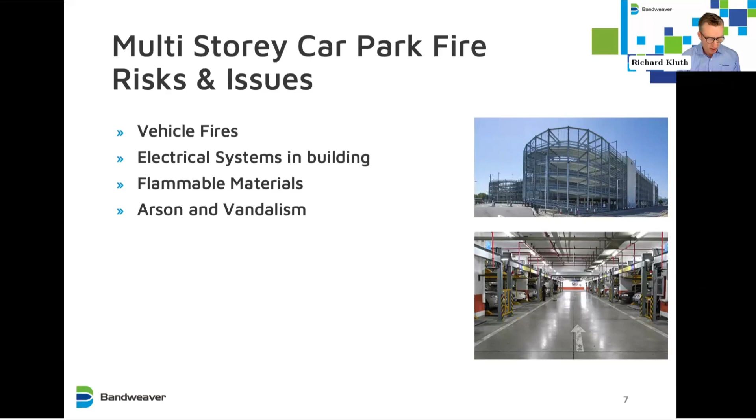Arson and vandalism - unfortunately these can be susceptible to both arson and vandalism. Inadequate ventilation and smoke management, especially in closed car parks, can lead to the accumulation of toxic gases, which poses additional risks both for people in the car park and the emergency responders.

And emergency responders have limited access in some cases. They can have issues accessing the different levels, which can hinder the response time and allow the fire to escalate dangerously.

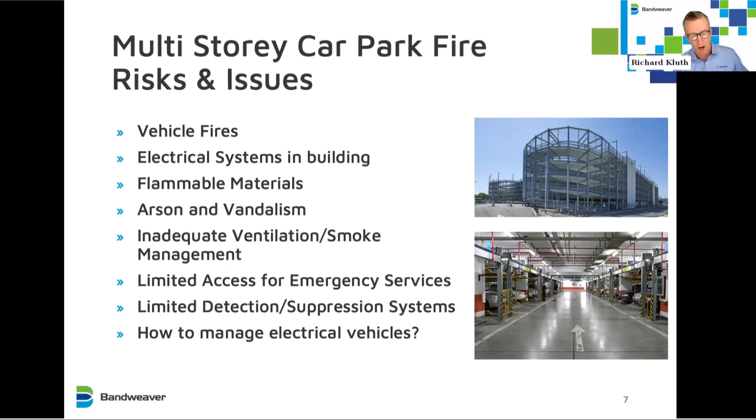This is going to introduce new fire risks which need to be taken into account. We'll start with the study of a major fire incident in the UK, and I'm going to look at the Echo Arena car park in Liverpool. A few reasons for doing this.

One is this is one of the largest fires in car parks in the UK, and as a result there's a number of comprehensive studies and materials that we can draw on from this to understand better what the issues are and how this can be addressed going forward.

So the UK Echo Arena, this was a major fire event that happened on the 31st of December, New Year's Eve, in 2017. More than 1,000 cars were destroyed, so it's a very, very large fire.

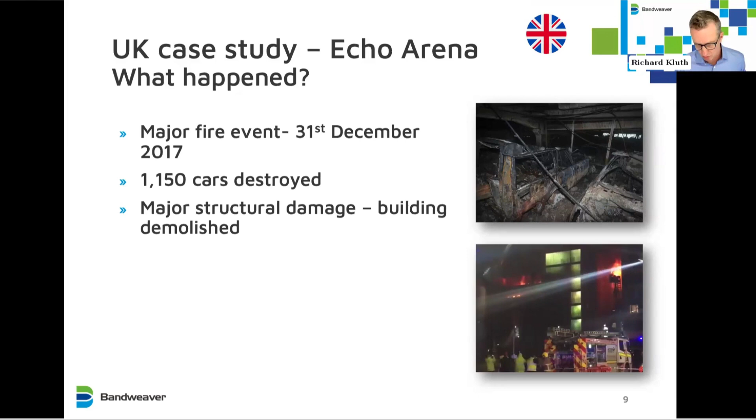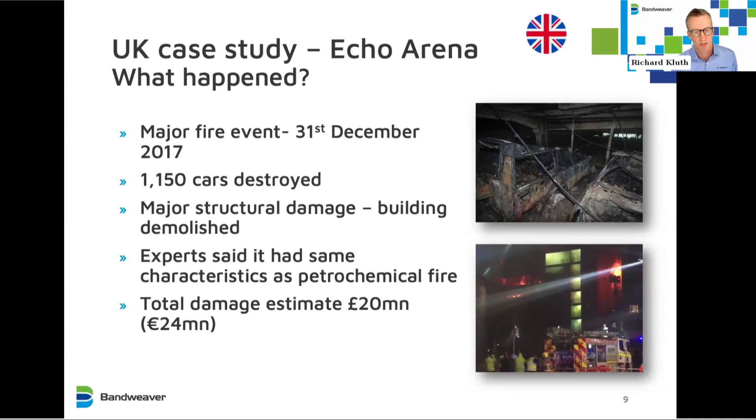So large that the building had to be demolished. There was major structural damage. In fact, the fire burnt so fiercely that experts said it had the same characteristics as a major petrochemical fire, which led to total damages of more than £20 million, or 24 million euros. So one of the largest car park fires in UK history.

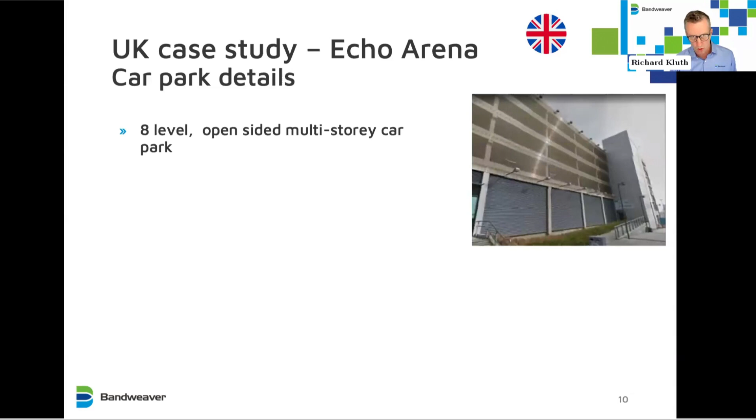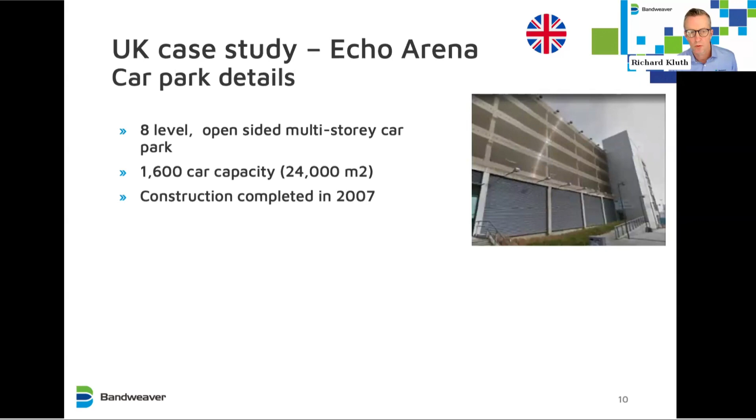So we'll go through the details of the car park. It's an 8-level, open-sided, multi-storey car park, with capacity for 1,600 cars and 24,000 square metres of surface area. This was built in 2007, so it would not quite be 20 years old now.

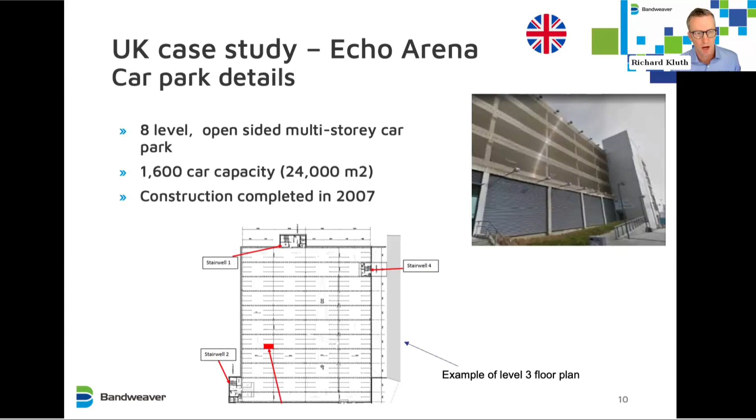And there we can see the floor plan of one of the levels - that's actually level 3, where the fire started. So it gives you an idea of the scale of the car park. And we'll have a look at the timeline now to give you an idea of...

...how it played out when the fire was detected, how the fire services handled it, and how long it burned for. The emergency services were first contacted at 4:42 in the afternoon, 16:42. They were on scene within 8 minutes.

At this point the fire was already burning quite fiercely. It was on level 3. The accounts were that it was already leaping across empty bays, and an additional vehicle was becoming involved every 30 seconds. So the fire was already intense at this point, but was believed to have been on a single level.

About an hour, just over an hour later, came the realization that it had spread to another level - level 4. At this point, all the firefighting was only on level 3, and this was the start of when the fire really started to get out of control.

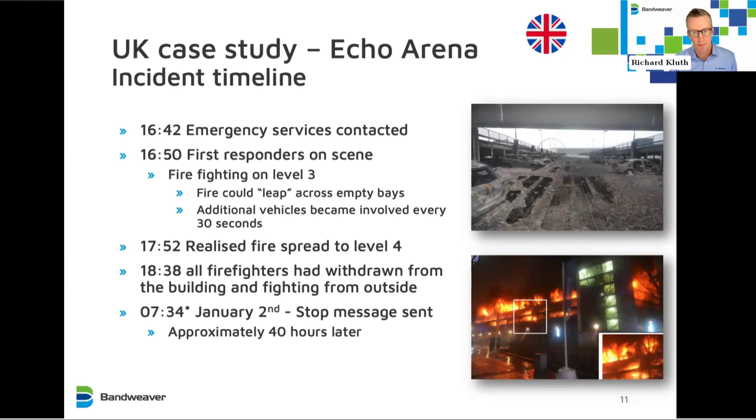If we look at where it was detected and how, that gives us an idea of what systems were there, and perhaps some of the shortcomings. So the first alarm was actuated at 4:43 - this was a manual call point, so this was a minute after the fire brigade were called on level 3.

And then at 4:49, the first sensor picked up the fire, which was a multi-sensor in the lift lobby. Interestingly, subsequent analysis showed that the incorrect location was put into the fire panel. It didn't matter in this specific case, but it goes to show some of the issues - even with detection systems you can sometimes not get the right location.

So very important issues. At this point, no other sensors detected anything at any other level. So they fought the fire on this level, and that was the way it was understood until 5:52, when CCTV confirmed there was a fire on level 4, but still no other sensors had detected it.

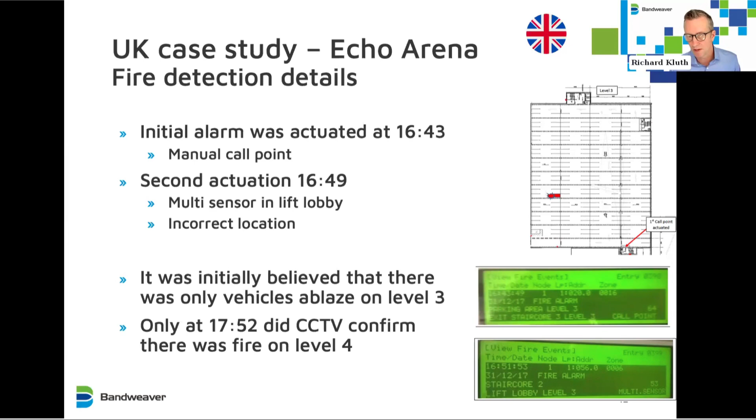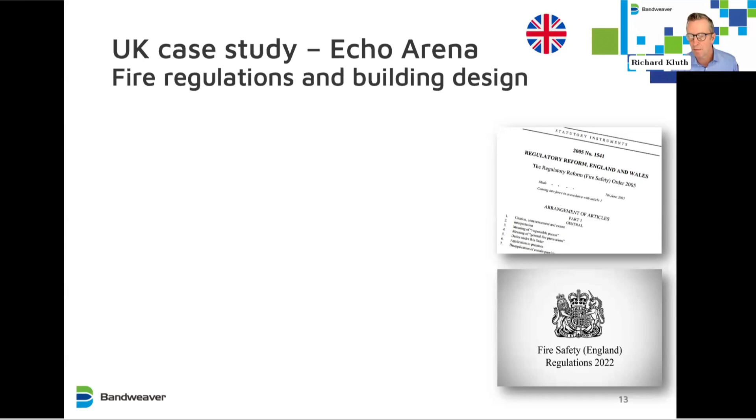So I think now we've seen the issue of the scale of the fire, it's good to have a look at the legislation which determined for this building and others around the UK, what legislation is involved in determining the designs of both the building and the fire detection systems.

In the UK, most of the research goes back to a study in 1968 held by the Ministry of Technology and Fire Offices Committee, done 56 years ago. A lot of the regulations and design for this car park and others went back to that research. At the time, some of the base assumptions made in designing the car park and the detection and suppression included that fire would not spread from one vehicle to another, which is clearly not the case here.

There was a lot of flashover from one vehicle to another, and also the assumption that fire brigades would arrive in 3 to 4 minutes to get the situation under control. With modern traffic, that's not a realistic expectation. In this case, they were there in 8 minutes on New Year's Eve. I think most people say that's pretty respectable, but 3 to 4 minutes seems overly optimistic for most cases.

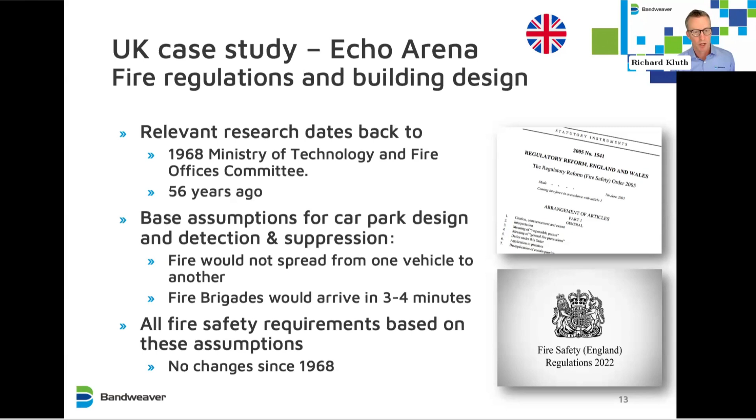All of the requirements based on that haven't changed since 1968. We'll look at the conclusions of the report, but I think there were a lot of questions as to whether that should be updated.

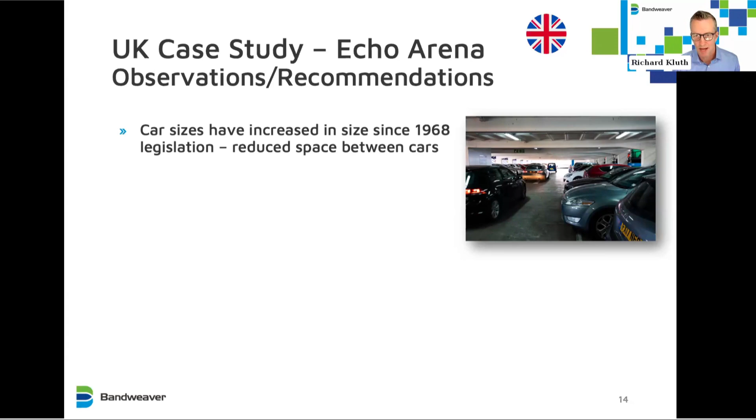Looking at some of the observations and recommendations from the various reports written on this fire, one key observation is that car sizes have increased significantly since 1968, so there's a lot less space between the cars. That's one of the key factors for the flashover.

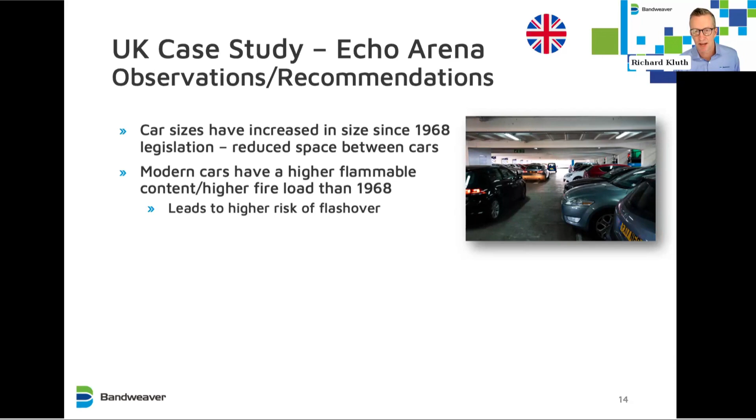The other thing is that as cars are bigger, they also have a higher flammable content, a higher fire load than in 1968. So the fact they're closer together and have a higher fire load doubles up on the higher risk of flashover, along with different materials in the car.

One aspect that changed is that petrol tanks are now made of plastic. If the fire temperature gets high enough, these can melt and lead to fuel running along the floor, which is what happened in this case, and was another cause for the spreading of fire.

The original modelling done by BRE does not replicate what was seen in this scenario. As well as the flammable materials in the car, there's much more flammable material in the building. Everything led to a situation which created this inferno, which probably wouldn't have been envisioned based on the material seen in 1968.

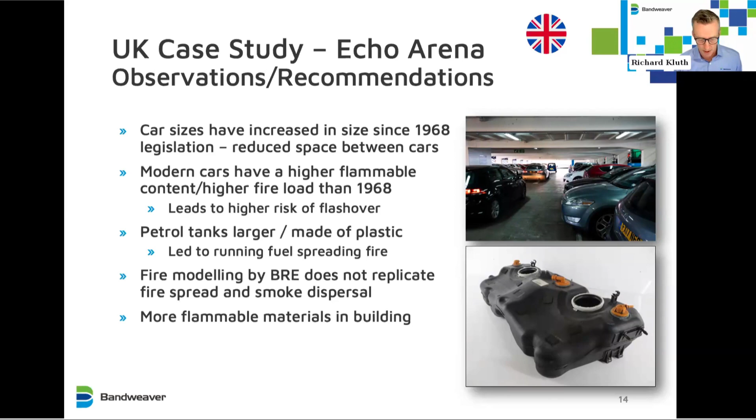Some of the conclusions drawn from this are that a lot of people feel the legislation does need updating to reflect the changes in vehicles and buildings we've seen over the last few decades.

Looking forward to electric vehicles, this is something for the future with different fuel types and charging stations. It changes the risk profile, and this is something our partners at SenseTech are starting to look at and integrate our technology into, but it's also something the legislation will be looking at.

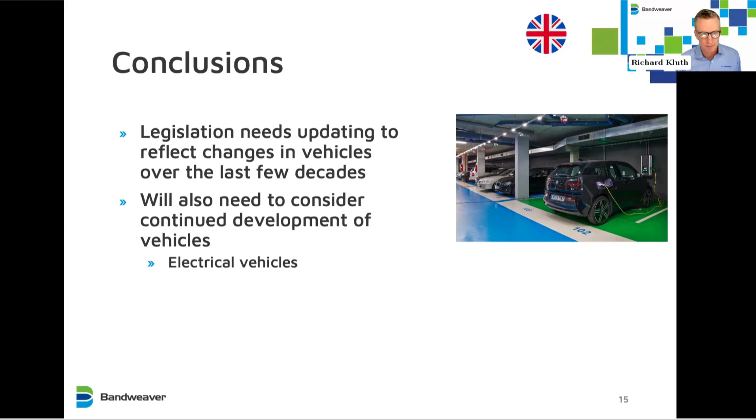In the UK, there was another fire at Luton Airport in October 2023, which again is increasing the pressure. There have been some initial discussions, but in due course the reports will come out with more recommendations. I think we are in a climate that is likely to see updates.

So if we move on to Europe and look at the regulations there - Europe is a combination of different countries, so each one has its own arrangements. We'll start broadly looking at the similarities in Europe and some of the frameworks, then do a deeper dive into the Netherlands, look at the regulations there, and really show how that results in specific detection technologies being chosen.

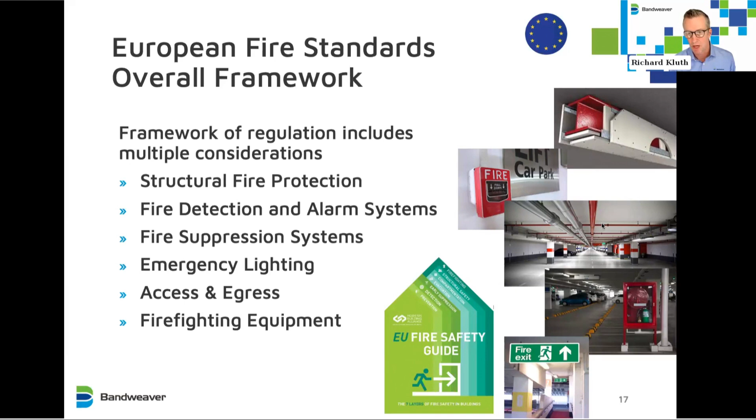There's a lot of different legislation, and for this we need many different bodies to manage it - this can vary from national, pan-European, local government bodies, through to international insurance companies. All of these will have different recommendations and consultations on how the legislation is implemented in different areas.

So it is a complex landscape, and if we look at some of the commonalities between them, one of these is the European standards.

What is consistent across Europe are the EN54 certifications, and I'm going to introduce the relevant EN54 certifications that are appropriate to linear heat detectors and our fiber optic technology. EN54 Part 22 is what is applicable to line type detectors, covering copper-based systems, multi-point and fiber optic that Marinus will talk about later.

These standards are consistent across Europe, valid and highly respected around the world. We see Middle East, Asia, South America also take reference from EN54 and often specify it. They're accredited by international agencies with high credibility - VDS and UL both accredit EN54-22, so it's widely adopted.

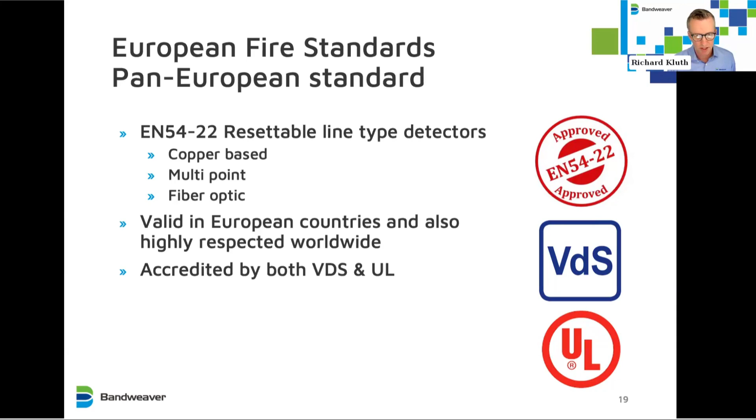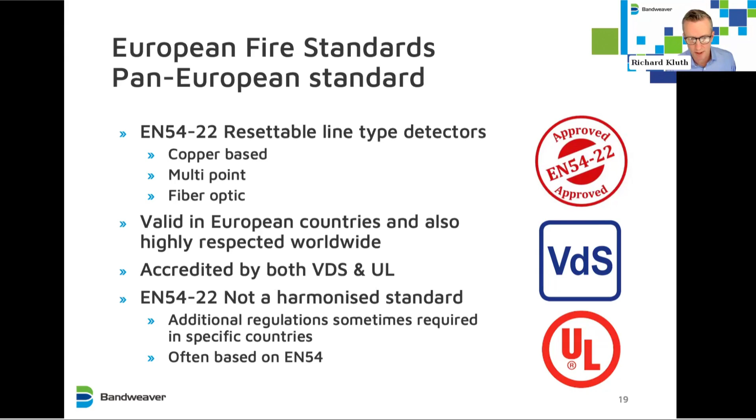So it does give some commonality, but EN54-22 is not a harmonized standard, so often additional regulations are required in specific countries. These are often based on EN54 but will have differences. To give an example, we'll look at the Netherlands.

In the Netherlands, we have the building regulations - I'm not going to attempt to pronounce that, I'll let Marinus and Hans in the Q&A take care of that if anyone wants to know how it's pronounced. This covers the building side and issuing fire certificates. With regards to the different standards, the Netherlands Institute for Standardization, the NEN, develops the standards related to fire safety.

This includes car parks, and these provide guidance on design and safety requirements across a wide array of areas - fire resistant materials, ventilation, lighting, structural design, through to energy efficiency.

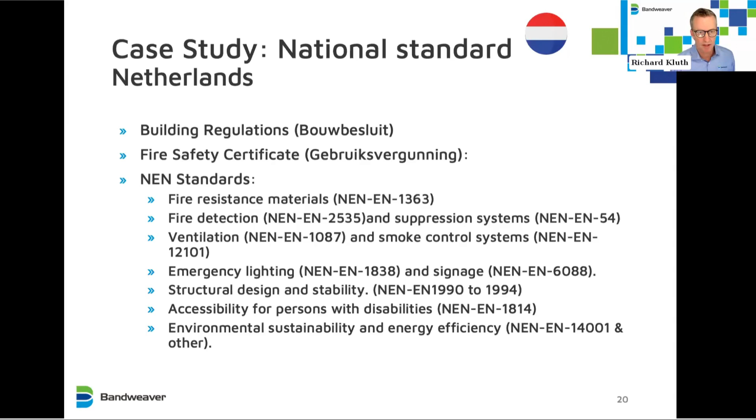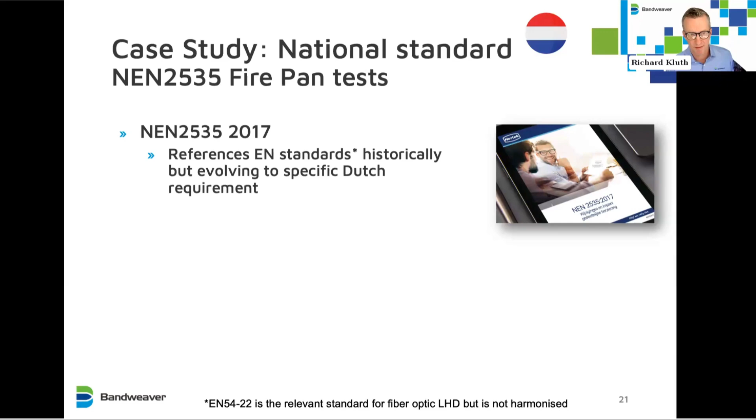The particular standard relevant to us is NEN 2535. This was put together in 2017. It references the EN standards, but has very specific features modified for the Dutch market.

Linear heat detection technology is not specifically defined in that standard, so the way they manage this is they use a fire pan test that has to be carried out in each installation at the commissioning stage. Marinus will go into some of the details of the fire pans and how that's done, so I won't go into the details there.

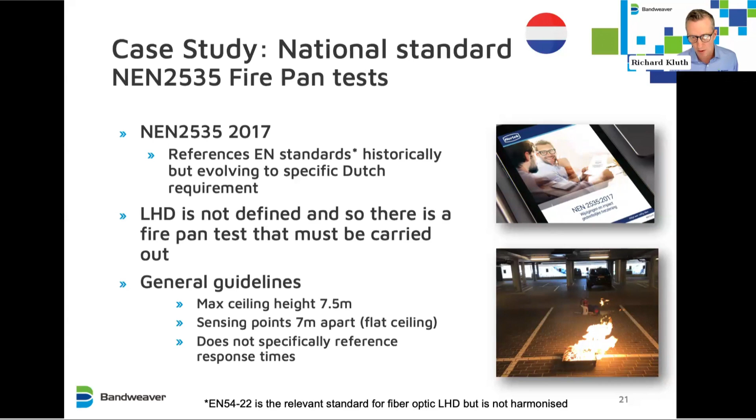There are some other general guidelines around ceiling height - you shouldn't go above 7.5 meters. The sensing points are generally 7 meters apart on a flat ceiling, and it doesn't specifically reference response times, but the system does have to respond while the fire is still burning, and it's a small fire, so it's actually quite challenging. This has a big impact on which technologies can manage this.

If we look at the technologies used in car parks, smoke detectors are not effective. Vehicle or exhaust emissions and dust can either cause these to block or to false alarm. Also, moisture and humidity in open garages means this is not widely adopted.

In the case of linear heat detectors, the digital analog copper-based cables generally can't pass these fire pan tests - they're not sensitive enough. We'll see an example of tests and what sort of temperatures they get up to, how early they trigger, but it generally means these aren't applicable in this market space because of the legislation.

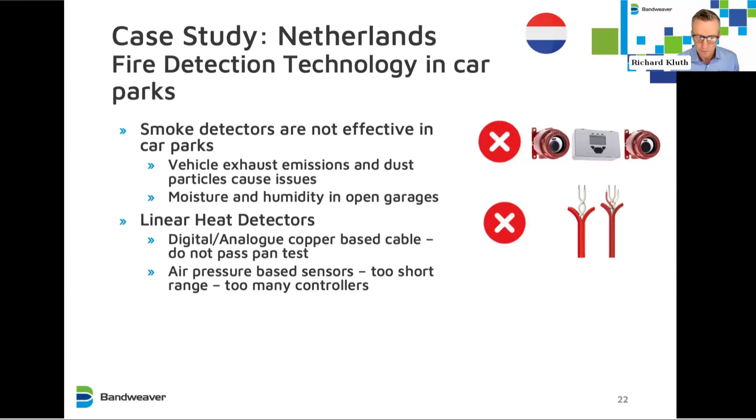Air aspirating pressure sensors, in theory, probably can detect in this environment, but they're very short range, and you'd need too many controllers, so they're not practically usable in this scenario.

So the two main technologies used are multi-point line type detectors, which tend to be used in smaller car parks, less than 7,000 square meters, where you can have the spacing closer together. In larger car parks, over 7,000 square meters, it tends to be fiber optic, which has continuous monitoring, and the economics become very favorable at the larger scale.

So there's my brief introduction as to some of the issues in Europe and UK, and I will now pass back to Sarah to continue.

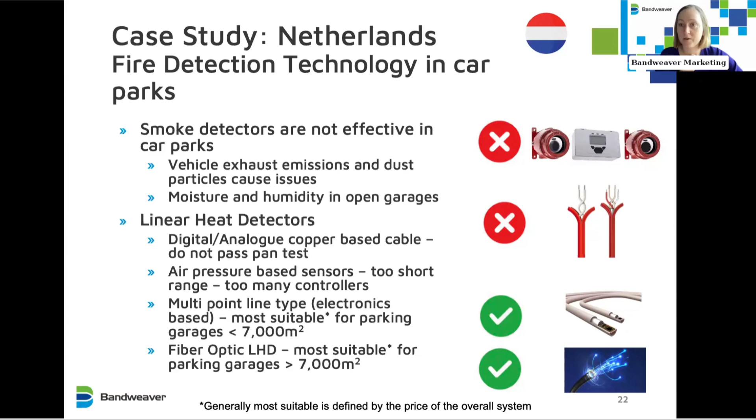Just a brief introduction to fiber optic linear heat detection technology from me, with a little case study in the Netherlands at the end.

Fiber optic linear heat detection systems use DTS technology, which stands for distributed temperature sensing. The system uses telecoms grade optical fiber, the same telecoms cable used in daily life for broadband. The technology is based on OTDR, which stands for optical time domain reflectometry.

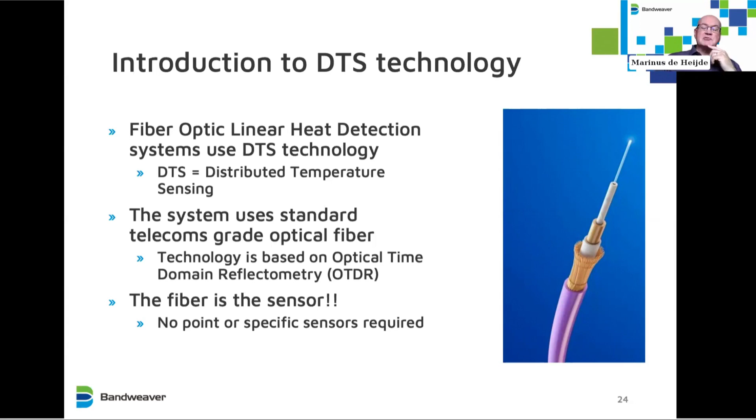The key point to take away from this is that the fiber is the sensor. No point or specific fiber sensors required, and that is really the most important thing to take away from this.

So how does it work? The control unit will send a laser pulse down the cable. This laser will interact with the cable and send back a signal, backscattered light. The time it takes to send it back will give us an accurate reading.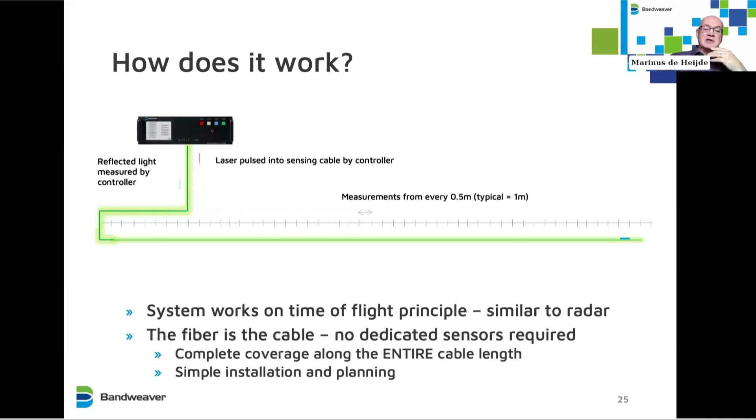Typically it's between 0.5 meter and 2 meters. For fire detection we typically use 1 meter. This system works on a time of flight principle, similar to radar. The fiber is the sensor, so no dedicated sensors are required, and it gives complete coverage along the entire cable length. As it is a single cable, it also gives you simple installation and planning.

Here you can see the cable overhead in a parking garage. So the key component is the cable.

No maintenance required. It's totally a passive sensor. There are no moving parts, it's not susceptible to corrosion, and it's got a design lifetime of more than 30 years. In some cases these cables exist for over 50 years.

It's also immune to electromagnetic interference. No infield power or comms required, so it is just the cable that is needed. It's very lightweight and flexible, as we will see later, and the cable thickness is 3 to 5 millimeters, which makes it very easy to install.

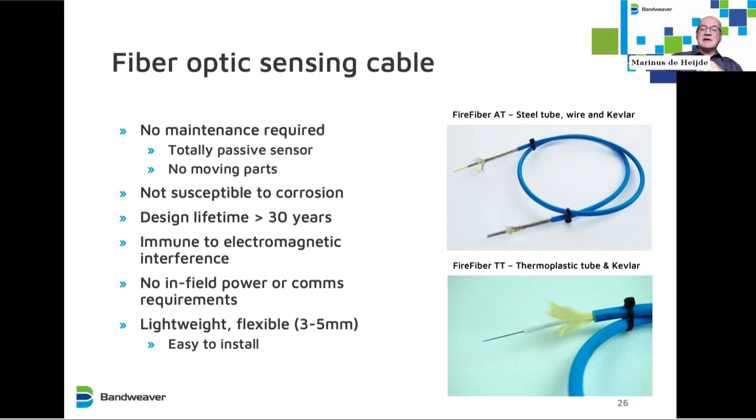So there's now a short video, and I hope this works correctly, with an introduction to the FireLaser unit.

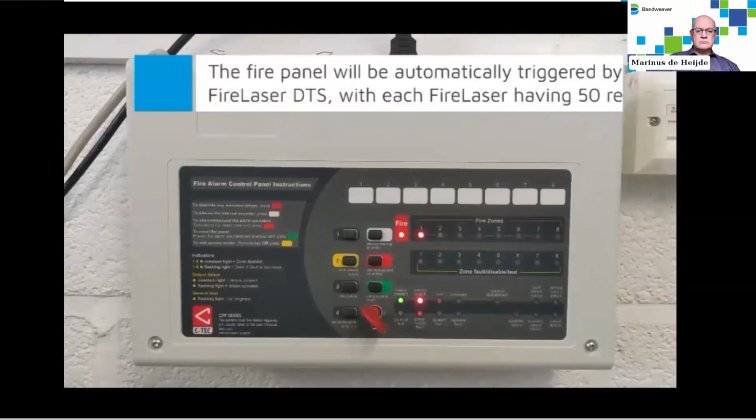I hope everybody was able to see that video clearly, as it gave a good example in a test environment of the control unit and the cable.

This is an example of a fiber optic linear heat detection system architecture. It shows you the parking garage, the cable going back to the control unit, and from the control unit via relays, in this case, to a fire control panel.

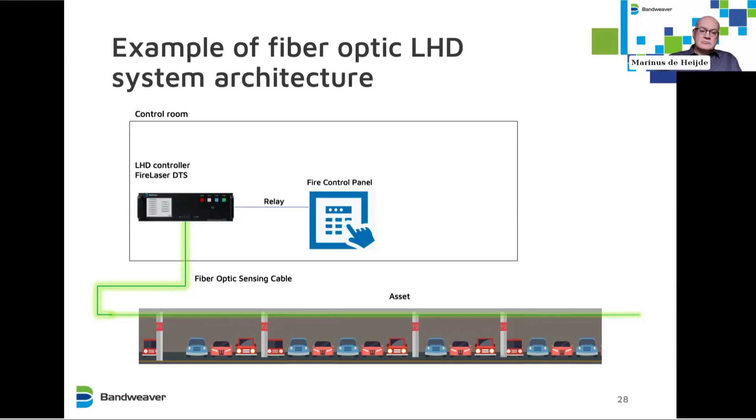Here we've got two examples, one of linear heat detection and one of a multi-point line type system. In the case of the linear heat detection, it will show you an example that it continuously detects everywhere.

I'm not sure why this is not working correctly at the moment, but it should show you that wherever the fire is located, it will detect. So the cable is the sensor, and it doesn't really matter where the fire is.

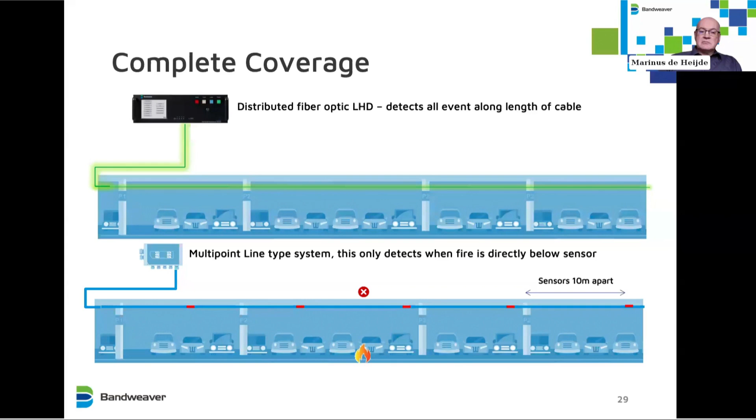And in the case of the multi-point system, if the fire is in between the sensors, it will take longer to detect and delay a response. So you can see here, yes.

We also have three types of different alarms. We have a deviation alarm, which deviates from an average temperature. Then we have a rate of rise alarm that will detect a change in the temperature in degrees per minute. And we have a maximum temperature setting, the temperature at which point the alarm triggers.

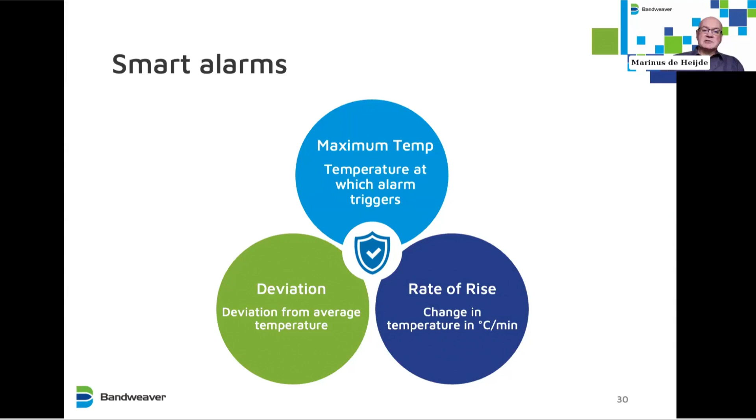We also have something called SmartZone. Software is completely configurable up to 1,000 zones with complete flexibility. You can put a stop and starting point in, put different alarms in different zones, and it is completely flexible.

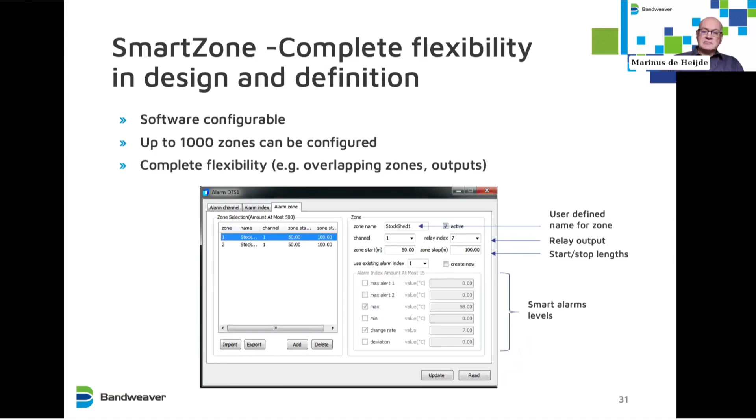A little bit about maintenance and reliability. The cable, as we already said, is completely passive. There are no moving parts, no apertures, and it's got a design life of more than 30 years without a maintenance schedule. It's a single cable installation, there's no power required, no comms network, and it's not affected by the environment.

Dust or particles don't affect it. In case of car parks, there's exhaust fumes, no electromagnetic interference, and humidity is also another point. So a mean time between failures, MTBF, of 29 years, which is Telcordia standard, a telecoms standard.

So it's a fully approved system, with EN54 Part 22 being the main one, but there are many other international standards that we comply to.

Next we move to the Netherlands with a car park case study. First of all, we're going to watch a short video that Hans, the owner of Senstek, has done for us, showing a practical installation in this case.

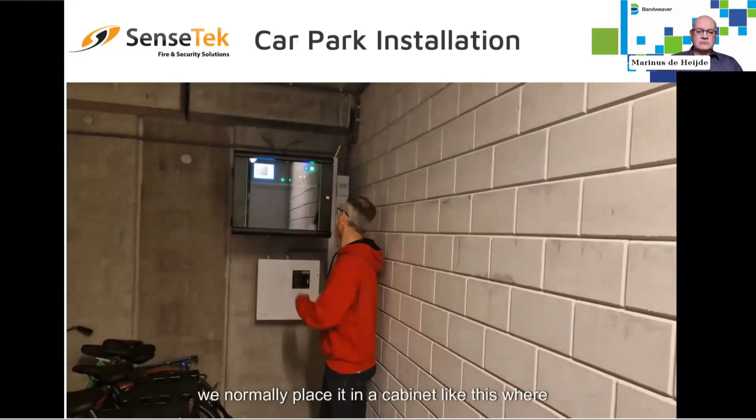Hi, this is the location from the controller. We normally place it in a cabinet like this, where we can open the deck as well. So here you can see the connections that we have made in the cabinet, and cables are located here.

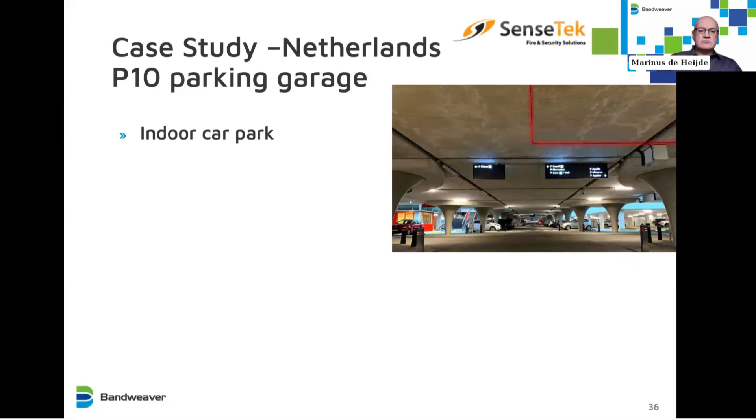Thank you, Hans, for that example, of which he has done many in the Netherlands. And the following is a short example of a particular parking garage called P10 in Amsterdam.

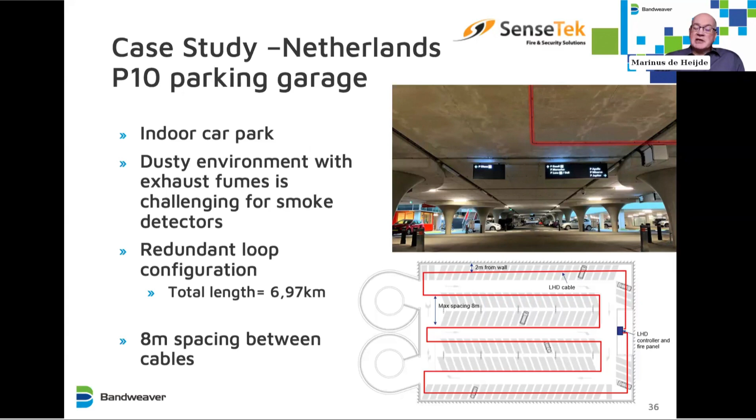It's an indoor car park, and of course car parks are very dusty environments with exhaust fumes, so smoke detection is not really an option. In this case, it was a redundant loop they did, as you can see on the drawing, with a total length of nearly 7 kilometers. And the spacing between the cables is about 8 meters.

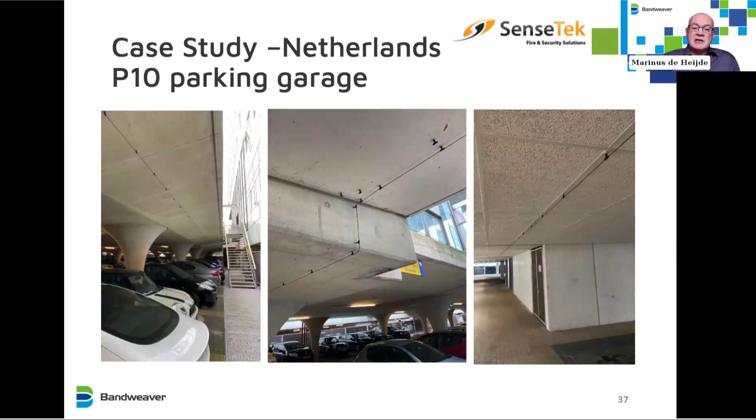So here you can see some examples of the cable installation with the varying heights. It is quite challenging, but because the cable is very flexible, it is not a problem at all.

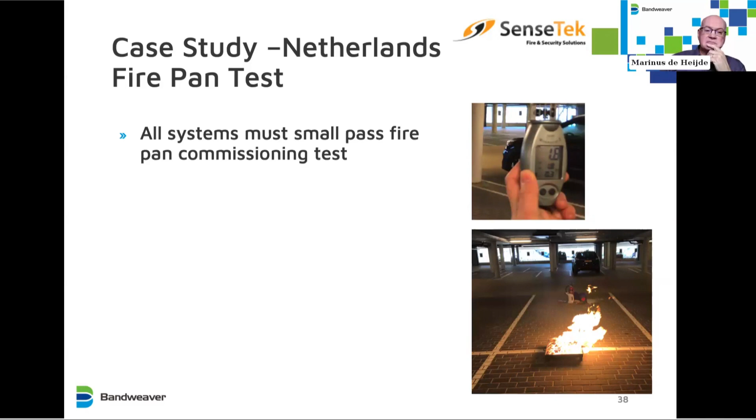As Richard already mentioned, in the Netherlands they do a firepan test, where they also measure the wind speed. All systems must pass this small firepan commissioning test.

It's a 50 by 50 centimeter pan with ethyl alcohol. And the ceiling heights vary from 2.5 to 3.5, and sometimes even up to 5 meters when they're in particular environments.

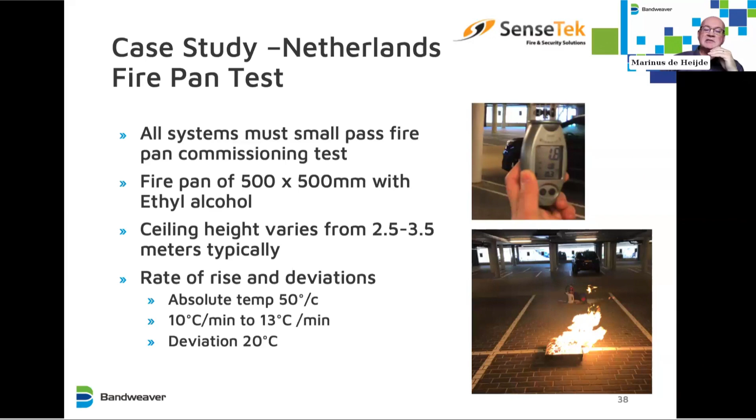So they will set the fire pan test at certain parameters: an absolute temperature of 50 degrees, from 10 to 13 degrees the rate of rise, and a deviation at 20 degrees.

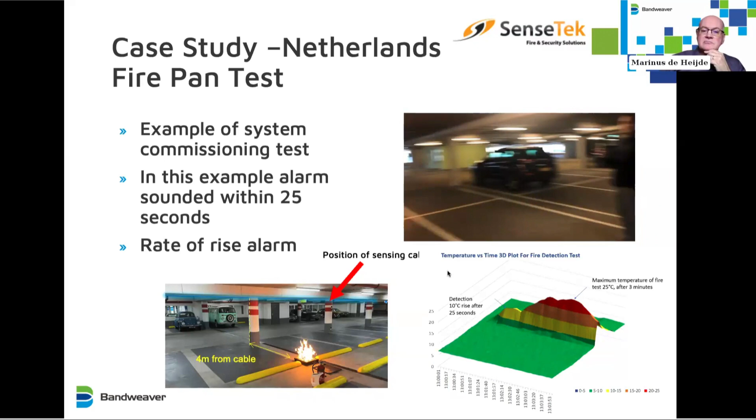So a little bit about Bandweaver now, some key details. Year of foundation is just over 20 years ago, so in 2022 we were exactly 20 years in business.

We've installed since then more than 8,000 systems and a total length of over 60,000 kilometers of fiber optic cable, which is an awful lot. Number of people is just over 300, located all over the globe.

And the key technology is distributed fiber optic sensing. DTS is the distributed temperature sensing. We also do something called DAS, which is distributed acoustic sensing, but it's a completely different technology.

So as you can see, we've got locations all over the globe, whereas I'm based from Guildford, our UK office. We've got an established international customer base, from Honeywell to Turkish Airlines, Schneider Electric, and many of them are repeating customers.

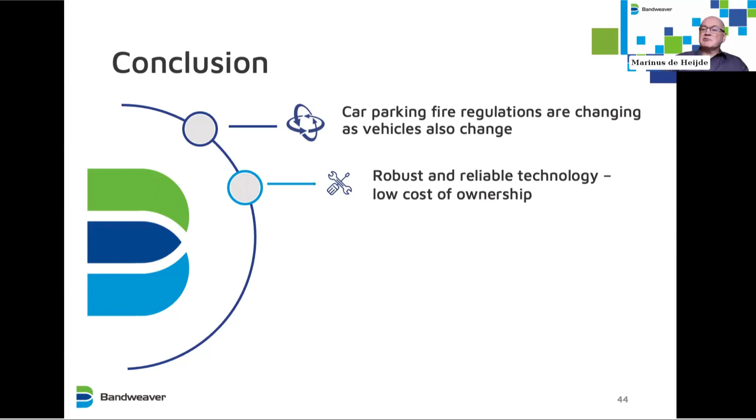Conclusion so far: car parking fire regulations are changing as vehicles also change, as Richard showed clearly. The technology is robust and reliable with a very low cost of ownership, if you bear in mind the cable lasts for 29 years plus.

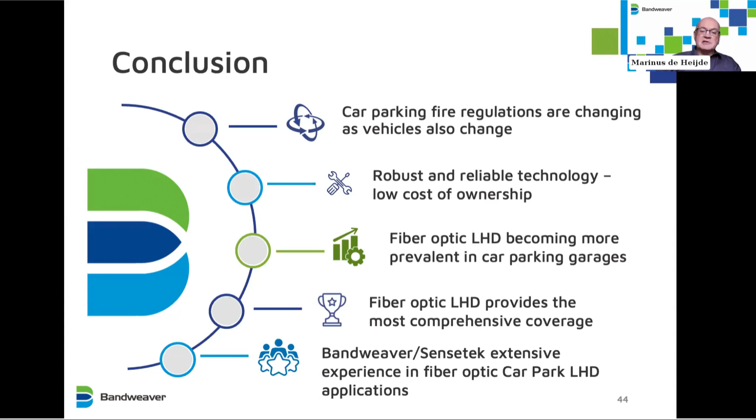Fiber optic linear heat detection is becoming more and more prevalent in car parking garages, and fiber optic LHD provides the most comprehensive coverage. And last of all, Bandweaver and Sensetek have extensive experience in fiber optic car park LHD applications. So with this, I hand you back to Sarah for the questions. Thank you.